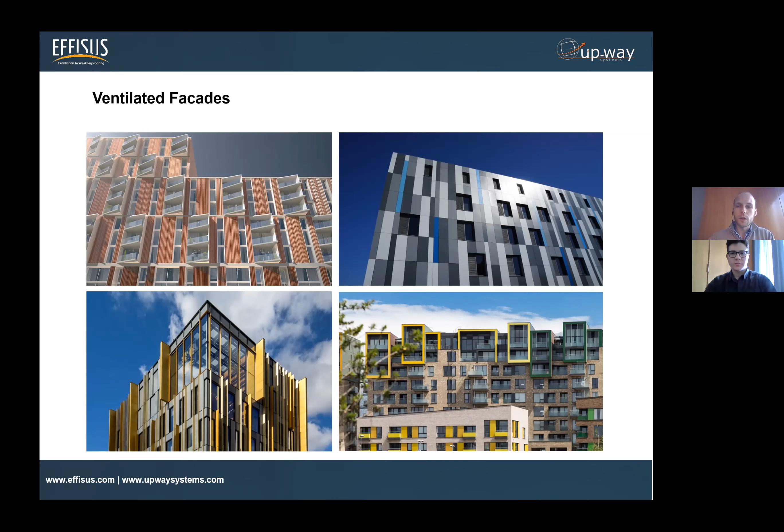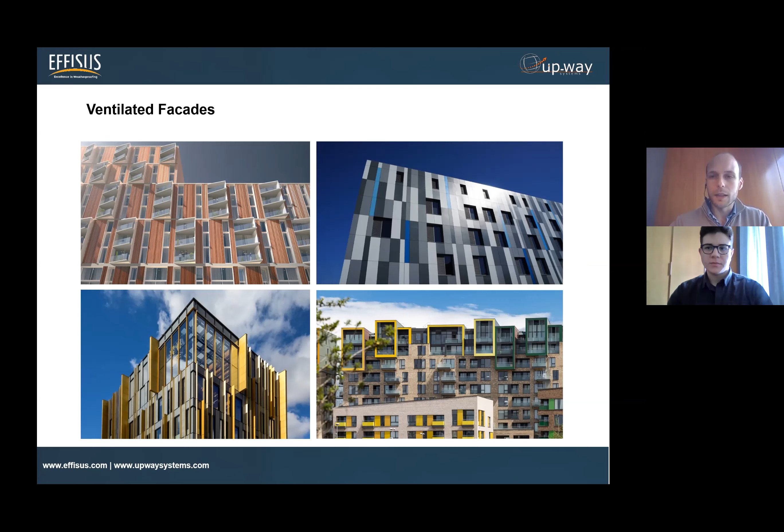Regarding ventilated facades, we all know what a ventilated facade is. We have an air chamber just behind the cladding that allows the facade to ventilate, so the moisture can evaporate. That's a whole process going on just behind the cladding to get the facade to ventilate. We can play with this kind of finishing, so we can have very different claddings and very different shapes. But we also know that the main performance in terms of management of water, air and vapor is not only on the cladding, but also behind the cladding, in the full facade composition. We'll be discussing that a bit more in this presentation.

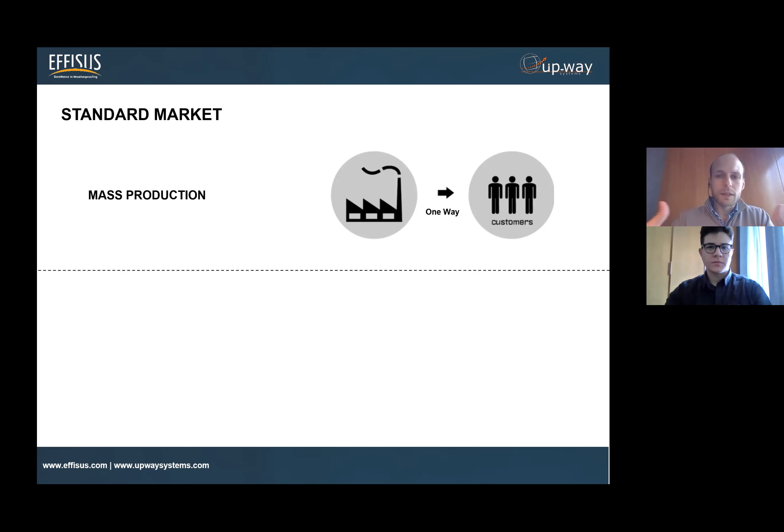So we have this standard market scheme that shows the industry right now is going in this one-way direction. This means that, in our point of view, the manufacturers are producing very standard products, and the customers just go to the manufacturer and ask for some specific or some products that they have available, but they don't even have a chance to discuss or adapt the product to their needs.

At Effisus, we really support, and would like this to be different, within this Effisus methodology, an interactive dialogue between the manufacturers and the customers, but not only, with all partners involved, in order to get the best solution we can for each project. This means understanding every project requirement and adapting, taking advantage of the technology we have available in each product segment, turning it into added value for your project, in terms of getting a very specific product or even a standard product that really fits the project requirement.

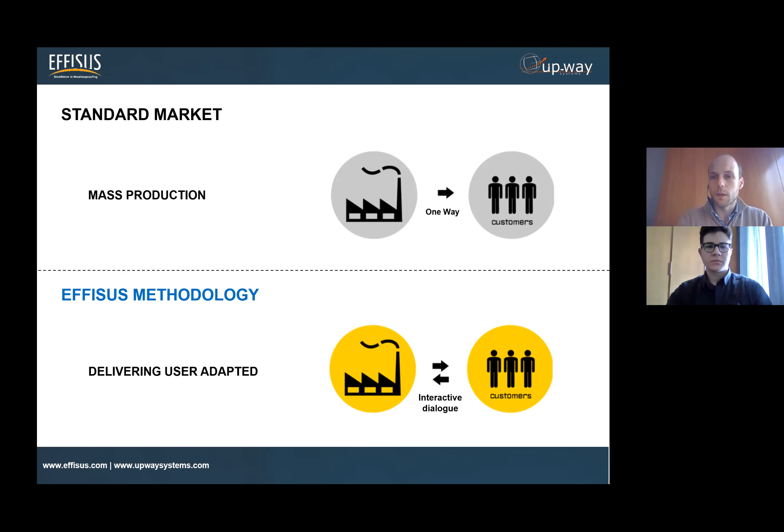So just giving an overview of our approach to the market, because we don't do this in a linear way just with the client. Of course we are focusing on the client, but we understand that in the very demanding markets we are involved in, we cannot do this in a linear way. We need to approach different layers of the facade industry, and those will be the consultants, the architects in the design stage, but also other players that help us reach the best solution in the end. For instance, laboratories and universities with whom we develop our products, test and certify them. We need to understand each market requirement in order to cooperate with these partners and reach a solution that fulfills the market requirements and each project's requirements. And of course insurance companies, the developers, because the whole industry plays as a single element sometimes.

Here, just really brief, as I'm aware you've already seen this: in the European climate it's cold on the outside and warm on the inside. We'll be focusing more on the European climate because it's the most used, for instance in the UK, where we have many projects ongoing.

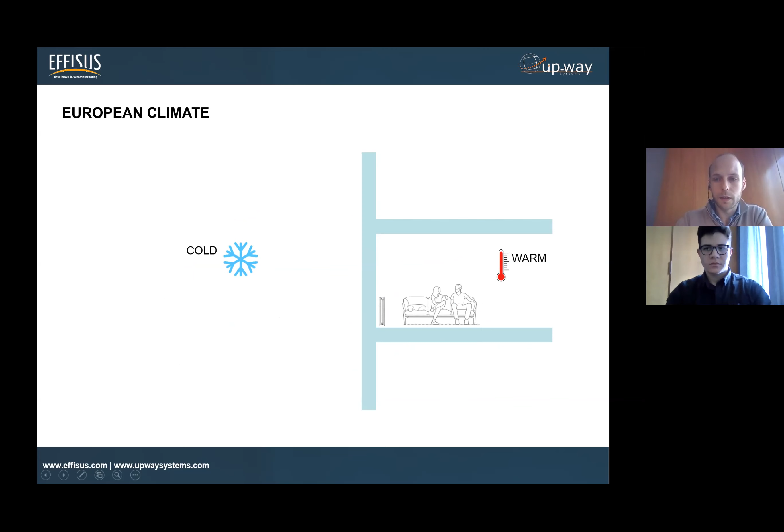Then of course we have rain on the outside in the winter season. If we look at the facade, the rainscreen cladding facade scheme, we'll see the cladding with its brackets holding the cladding. Then we see some particle board, for instance, or the sheathing board. Then the insulation layer, within the SFS system for instance. And then we'll have the plasterboard to finish on the inside. If we try to understand how vapor diffusion occurs within these facade layers, it's coming from the warmer side to the colder side. So if we try to block it, as we'll be talking about, waterproofing membrane.

If we try to block the rain from the outside, just protecting the sheathing layer, we'll see something like this, just covering this board and avoiding the water to go in. But if we do have a waterproof membrane that is also vapor tight, we'll be blocking also the vapor to go out, and of course generating condensation as the vapor will be present within the facade layers.

When crossing the dew point, so when it is turning into liquid, it will be just stuck in there and will damage the interior of the facade, in this case the insulation layers, that will not be performing well.

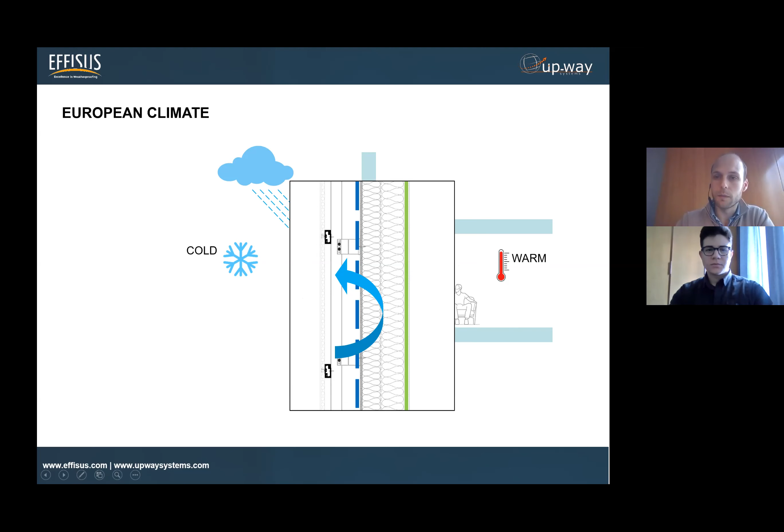So João, I don't know if you have any, not yet, any chat. No, yeah, you can just help me through with that. I would appreciate it.

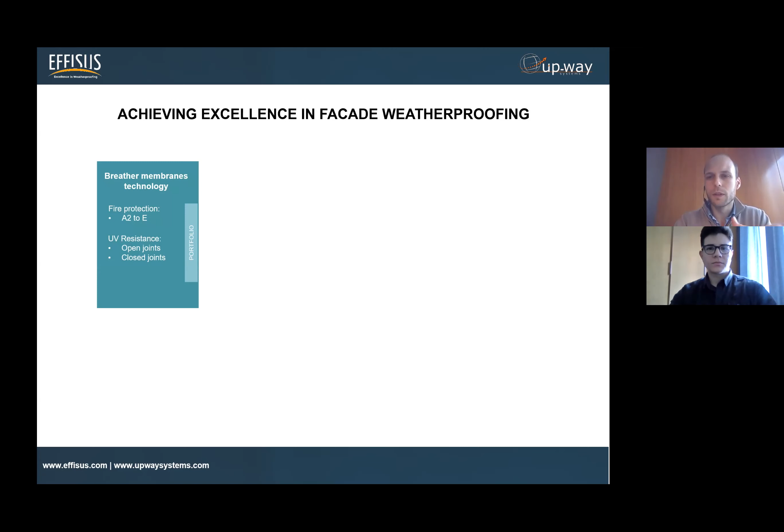When we talk about achieving excellence in facade weatherproofing, this is something that we discussed many times as we are within the weatherproofing thematic. So how do we see the facade in terms of weatherproofing, in terms of layers or divisions that we should approach and understand?

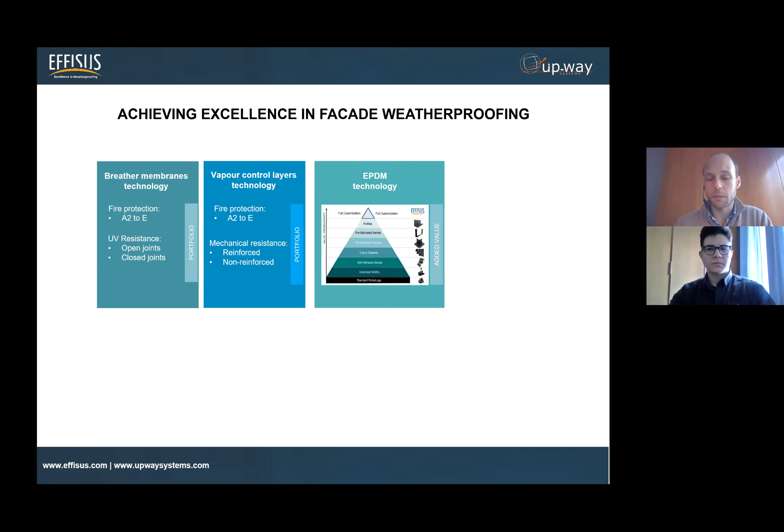So we have here breathable technology, okay, we have here VCL technology as well, EPDM technology, or interfaces technology, so something that connects both breathable and vapor with the interfaces, and we can be talking about windows, but also about roofing, existing buildings, so many others.

Then we have prefabrication technology, that is a very specific division that we have, that basically takes advantage of the technology already existing and turns it into very specific solutions. So really understanding very specific projects, very specific needs, and coming to the market with very specific solutions that fulfill those requirements.

And sometimes it's not able to do that with very standard membranes, very standard dimensions, and so we're able to go all the way across that requirement. And then we have our consulting department that is basically supporting these four elements.

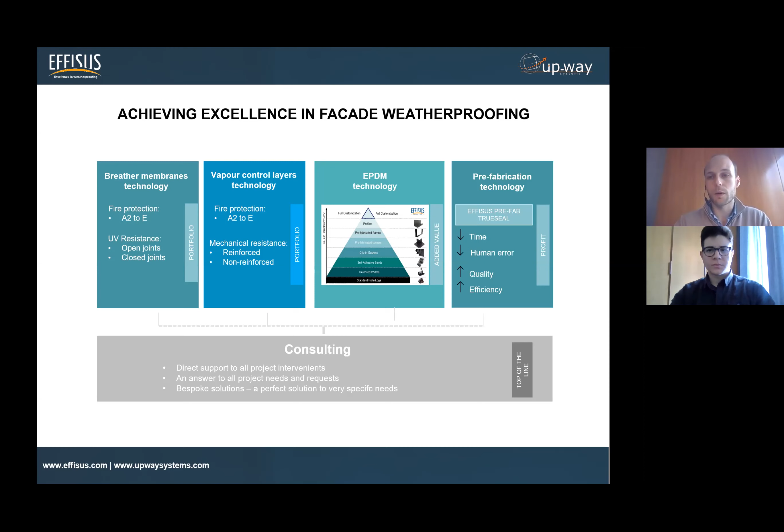And this scheme, in fact, is the one we are practicing, so it's the one we have in our company. But we really believe this is the only way of approaching a weatherproofing rainscreen facade and having a really high performance solution that again fulfills all the project requirements.

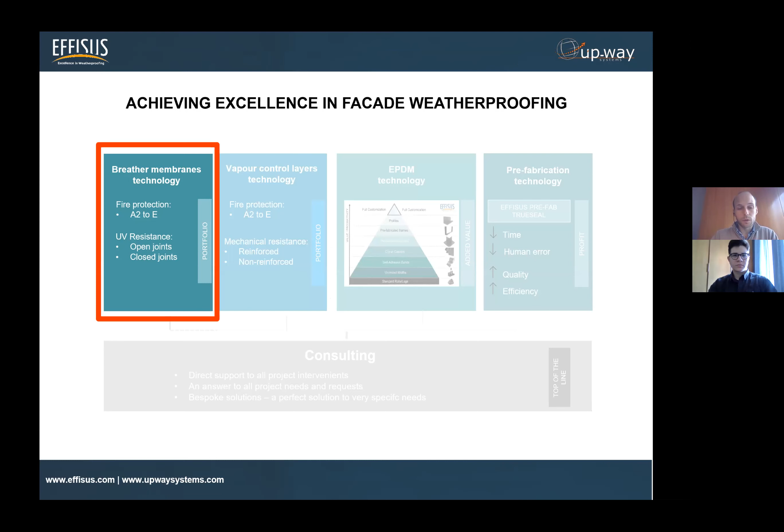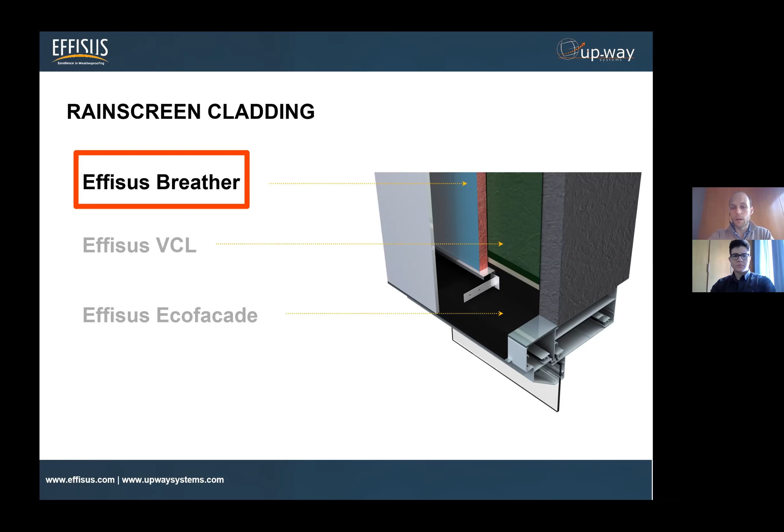So today we'll be more focusing on the breathable membrane, just looking at a 3D model where you see the breathable membrane on the outside of the insulation layer, the VCL on the inside, and this membrane just doing the connection, as I told, not only windows but others. And then we have breather membrane again that we'll be focusing on today.

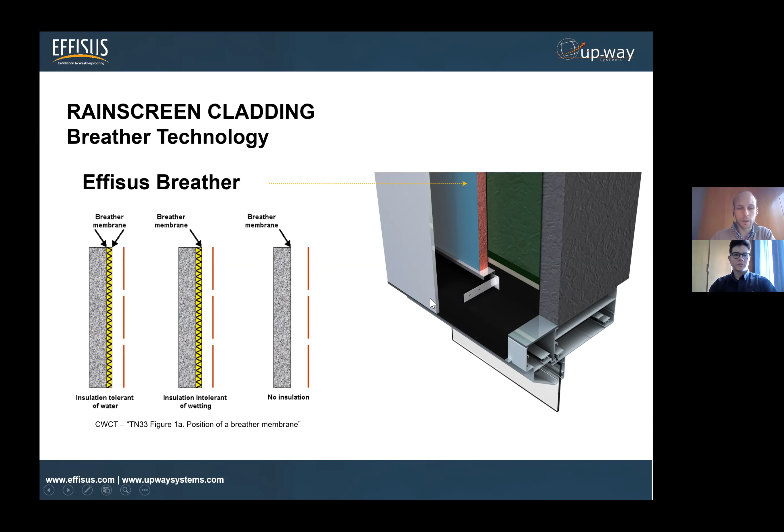So just speaking from this case from the CWCT manual, this illustration about the placement or position that we can have the breather membrane. Just to mention that this is not a linear approach, okay, we should look at every project as a single one. So this is just to mention that we can have different places to put a membrane as to improve the facade efficiency.

In this case, we have here some problems, so some corrosion of component, saturation.

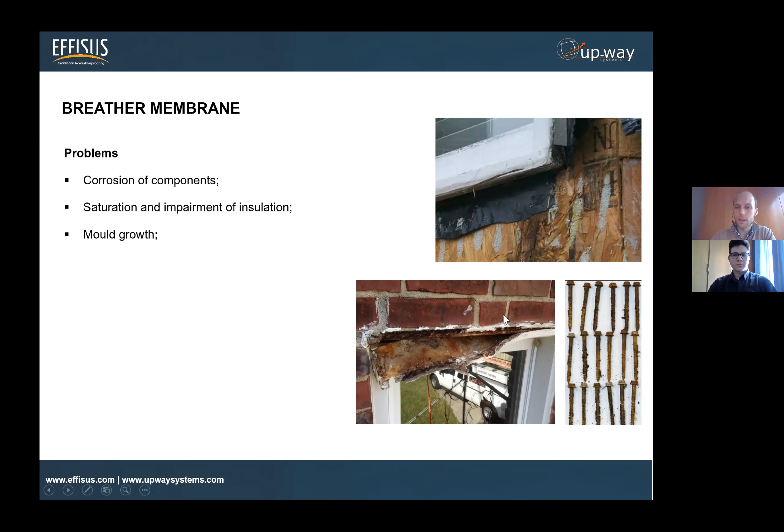This is also, of course, because of the water getting inside of the facade, or the water being imprisoned within the facade, so metal components being corroded. And then we have saturation, so insulation becoming wet and mold growth, as the water is not able to let the facade evaporate, or it's able to go in, maybe sometimes because of the lack of a VCL, for instance. So here are other problems as well.

João, would you like to highlight some of these pictures we're seeing now? Absolutely, Henrique. Here's a couple of situations we face, usually because of the lack of use of the breather membrane, or sometimes even poor workmanship during installation, not having a breather membrane. I'd like to highlight mold growth, because this is very common, especially in the UK market. We see this a lot. This comes from the fact that, as you're saying, mostly when you have wet insulation, this condensation will come in through the inside and start causing this type of problem.

At Effisus, we believe the insulation layer should always be dry, or as dry as possible. That's why in our projects we see competitors or similar products saying 'water repellent insulation layer' and stuff like that. What we recommend is to test it, actually see how this material works over time. I think it's completely different than having a breathable membrane.

Other types of problems we see are adhesion problems and compatibility between substrates, depending on how it's installed. Sometimes we have an open gap. For instance, we have data showing that if you have a 1 millimeter gap during installation of a breathable membrane, you're actually adding up to 800 grams of water per 24 hours, or per day. This is stunning when it comes to all the problems we see on site, and that's why today we're focusing on how important it is to have a breathable membrane in this case.

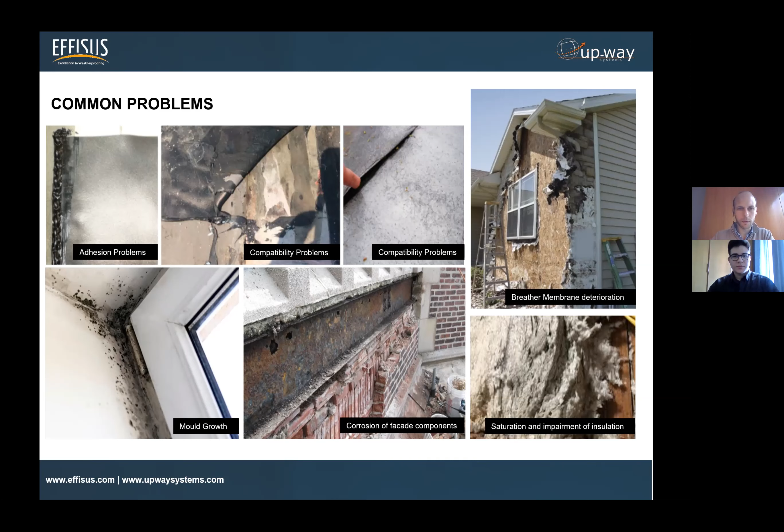One of them is the protection against driving rain, because, as I mentioned before, we are in fact using a breathable membrane as a waterproofing layer. So it's to protect the facade from driving rain, meaning we cannot have liquid water coming from the rain and reaching the interior of the building.

Then we should also be able to understand its protection to wind and moisture. With wind, we have different breathable membranes—some of them are more airtight than others, for instance, and some of them play with the pressure of the air. But all this information should be available on the technical data sheet.

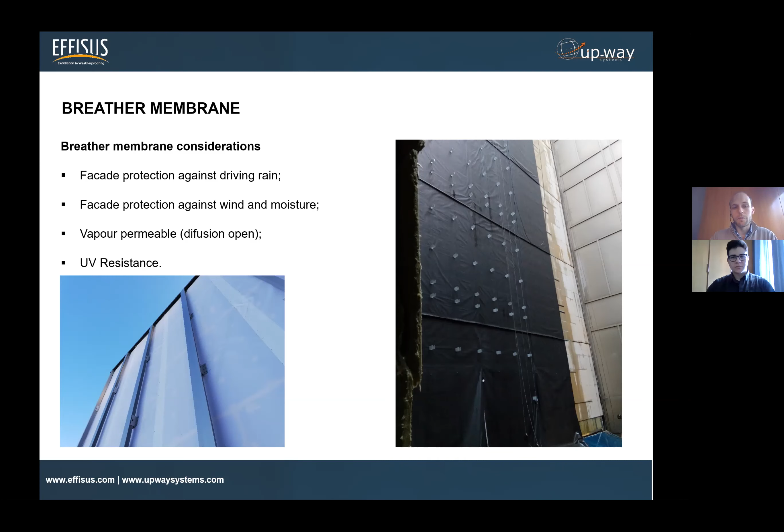And then we also have UV resistance, mainly because of the installation process—during construction it will be fully exposed until the cladding comes, and this is something we should be aware of and comprehend. We need to understand how long it will be exposed to UV, and whether it will have open joints—for instance, if the cladding has joints of 40 or 30 millimeters, we should pick a membrane that's able to withstand this kind of UV exposure, because many of them are not prepared for it. So these are some of the considerations.

João, would you mind guiding us through this table, please? Yes, so here is pretty much our portfolio when it comes to breathable membranes. Again, it comes down to the project experts to understand what you're going to need for your project. I'd like to mention, as you said, UV on the last slide.

This is actually quite important when deciding which breathable membrane to choose when you have an open cladding joint. We have a couple of possibilities. For instance, the Breather FR-B allows us to have open cladding joints up to 50 millimeters.

It's important to mention that even during the construction phase, most of the time these breathable membranes are going to have total exposure for 3 or 6 months, so of course we need UV resistance for that.

Another very important fact is the tear and tensile strength. As you can see here, it can go from a regular breather membrane to a very extreme resistance to tear and tensile when it comes to Breather FR.

The same thing is a very important topic in the UK and Middle East markets, which we're constantly facing with this type of project: fire reaction resistance. We're able to provide from Class E to Class A2 S1 D0, which is the best you can currently find in the market.

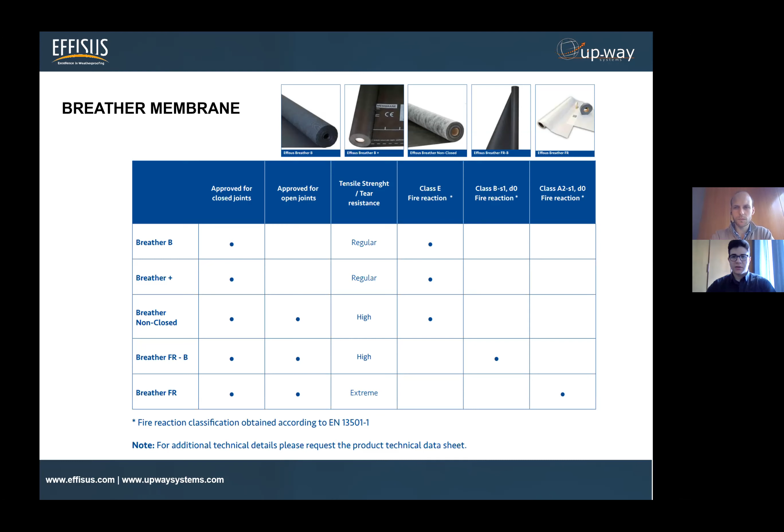Very good. We also have the last one you were just talking about, fire, and it leads into this slide mentioning the A2 fire-rated breathable membrane system we have. Just a few more details you'd like to share about this specific membrane and system?

Yeah, we've mentioned this product a lot, including in our fire-rated sessions, when it comes to the Effisus portfolio FR system. What's very important to mention about this product is, as I said, when it comes to fire reaction, it's the best you can get on the market.

We're able to achieve this because of the whole material properties and technology we've had since 2011. This is important to mention, because even just a couple of years ago this became a very topical issue, but we already had this ready to sell since 2011.

This whole membrane is tested and achieves the A2 S1 D0 fire reaction classification, including the accessories. So this is quite something different. When I mention accessories, I mean the fastenings, double-sided adhesive tapes, and fast adhesive tapes for sealing perforations.

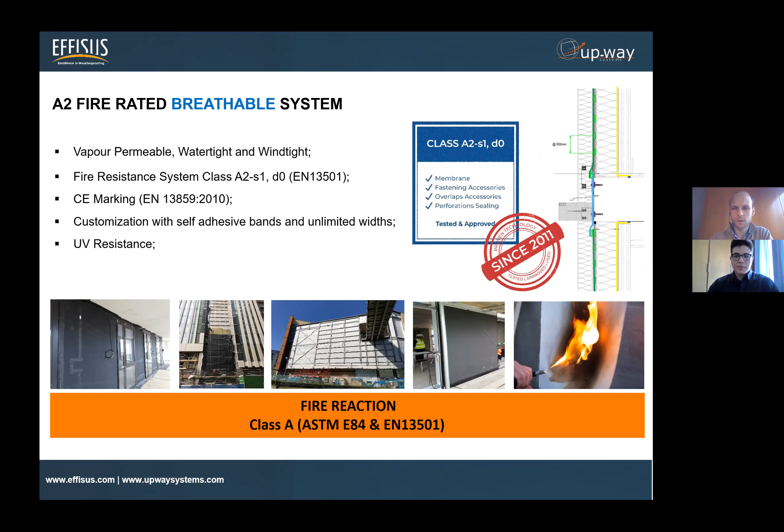The standards say this should be tested standalone, but we decided to go further and include all the accessories. Would the fire reaction classification remain the same? That's what we did, and that's why we call it the FR system—because it includes the whole accessories for the application. It's a very important thing to consider.

Here we can also see, regarding this solution and system, since 2011, with all accessories included, a relevant difference between standard Class B membranes and our A2 fire-rated membranes. Here we see fire performance, as we were discussing.

You also mentioned in the table different levels of performance in terms of tensile strength. Here we can see there's really a big difference between our A2 FR membrane and a current standard Class B membrane, but also in tear resistance. So in terms of mechanical resistance, this is really a solution that improves facade performance.

Absolutely, Henrique. What I always mention here is that you're not only buying fire performance, you're also gaining a lot in mechanical resistance, tensile and tear resistance, compared to just a normal Class B breather membrane. Again, this is because of the whole technology and material properties—it's based on fiberglass, so it's very mechanically resistant. Yeah, indeed. Okay, thank you very much.

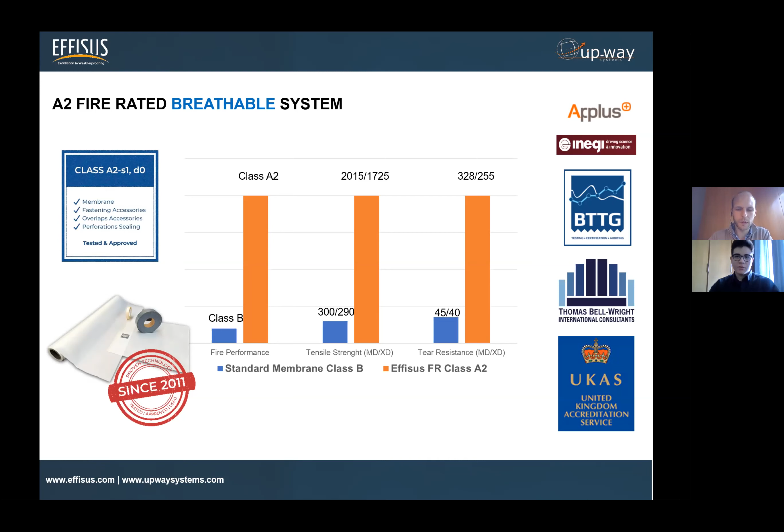So just briefly going through the method statement of the membrane, also to allow you to understand that this membrane has these interesting features, so interesting resistance, etc. But it's no more in terms of installation than a...

The fixing to the substrate is currently done with the self-adhesive membrane, so both sides self-adhesive, like this tape here. We just remove one liner and apply it to the CP board, for instance, then remove the upper liner, and you can unroll the breathable membrane on top, and it will be automatically fixed on that.

This is a temporary fixing, as the cladding will then bring its own brackets and will hold the membrane definitely into place. But even until those brackets come, we have really interesting experiences on some ongoing projects, and some already finished, where they have experienced really high winds, heavy winds, and even without the bracket, only with this fixing tape, it stayed in place. So, perfect, good, very good performance. But again, this is intended as a temporary fixing.

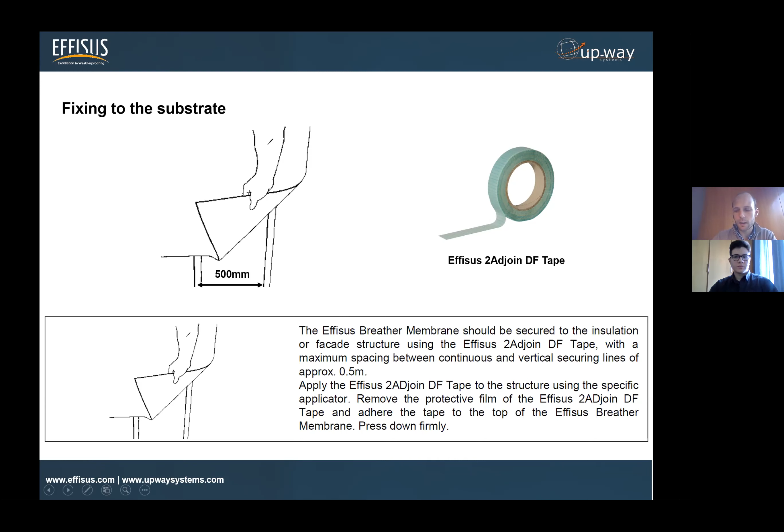And then the same tape in the case of the breather FR membrane, which is also an interesting feature, because it allows you to play with one single tape to do two things with the fire-rated membrane, that is fixing to the substrate and making the overlap. So in this case, we'll be applying 2 lines of this tape on every overlap that we have between rows of this membrane.

But as we play with the full portfolio of breathable membranes, we also have cases where we should use different tapes. Even though we'll be always supporting the site, supporting the design, in order to understand these accessories that should be used or not, and how they should be used, because that's something we really find important to share. We do not believe it will be easier for someone outside this spec of products to understand how this should occur, or what's the best accessory to use in this kind of substrate, etc.

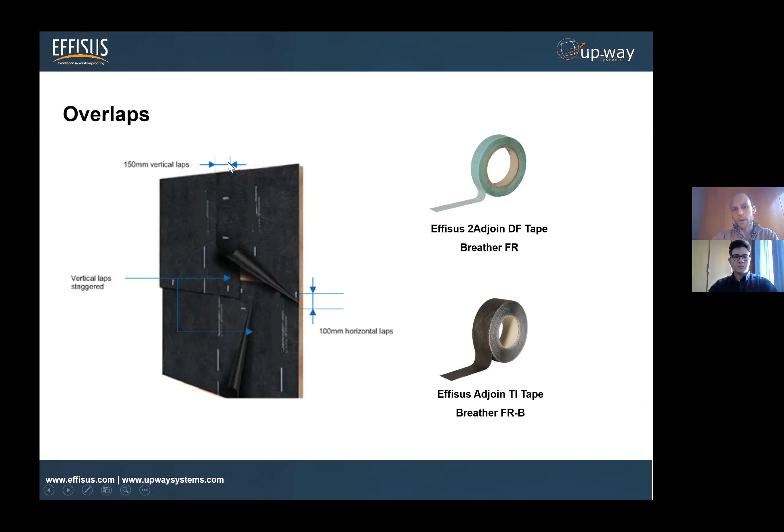So here we can see also some mention to the overlap width. So we can see 150, 100 millimeters. I can tell you that this is a very usual overlapping width, and also applicable to the fire-rated and to the other breathable membranes that we have.

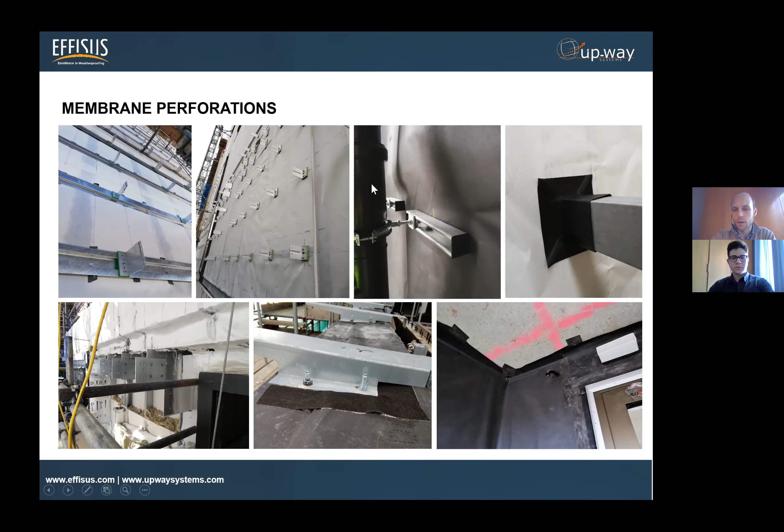So we have solutions for each of these situations. And for instance, when we're talking about a membrane being perforated by a screw or nail, we have a very specific tape. João, would you mind just sharing some information about these solutions, very interesting solutions that we have for this kind of perforation? Yes, indeed. So here, what we do is obviously look into details of each of those perforations, how actually we need to seal.

So here it assures the complete watertightness of this sealing of these brackets. So in all the projects, what we do, when we have this type of bracket sealing scheme on the facade, is just to apply a patch of this membrane that comes in rolls, as you see. We cut it to the dimension, say a 5x5 or 5x10 patch, apply it on the bracket itself, and then fasten it. Once you fasten it, it will be completely sealed.

We have additional testing on this tape itself, we have a lot of experience. Again, this is all tested, for instance, in the Effisus FR system. So it's very important to have someone look into the detail of how exactly you're going to seal this perforation. The important thing here is just to pick up all of these details in an early stage.

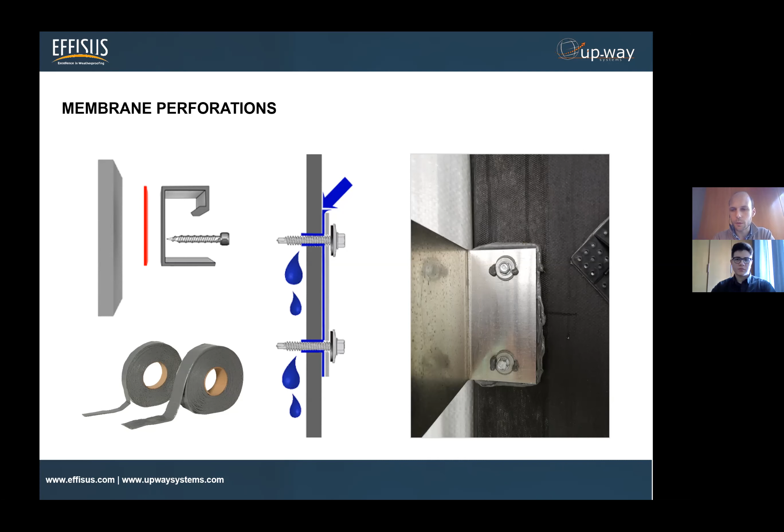So when, for instance, we're quoting a project, even if it is still in the design stage or already coming to the site, we also take into consideration this kind of perforations, this kind of consumption. So we try to give an estimate of how many brackets we may find on the job, and we also try to provide this information even without being requested.

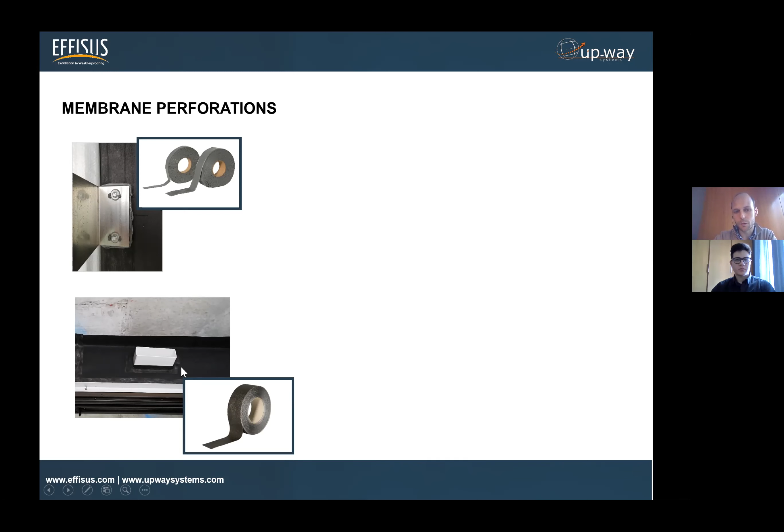Just to understand, we have many times these tubes just crossing the facade, normally because of ventilation requirements. We can deal with a very simple tape to avoid this kind of leaking just on this perforation.

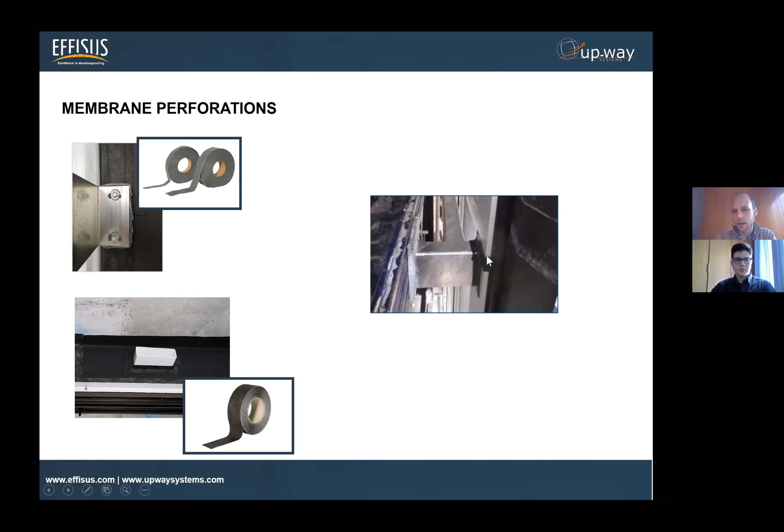Then also different kinds of elements and materials that we need to shape, or find a solution that is able to shape all around it. Here we can have different tapes, some of them really interesting. There are, for instance, EPDM based, but able to be shaped so that we can turn it into the very specific format of the element that is crossing the facade.

We can also play with already prefabricated EPDM pieces, for instance, that still have the same capabilities of the normal, standard EPDM, but avoid the need to cut and slice on site and cover all of it with glue. So making a great finish and better efficiency.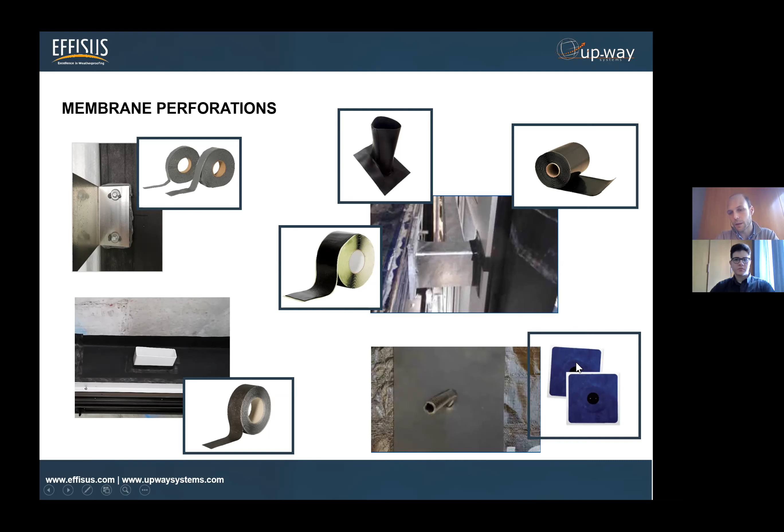And then, for instance, pipes — we have these tight rings that are just applied on the tube, on the pipe, on the cable, in order to seal completely all around the cable, and to make a perfect connection with the breathable membrane. Self-adhesive, really easy.

Then just to overview a little bit about the importance that we find on detailing breathable membrane. As discussed, for us, every project has its specific requirements, and so we really understand that for each project we should have a very specific solution.

Not the same breathable membrane for every project. We need to understand each project's requirements, and some of the requirements we've already highlighted before, such as UV resistance, water, vapor permeability, fire, etc.

This, of course, will allow us to reduce the probability of leakage points, as all of it will be predicted, and we'll also be focusing on the perforations, as we just saw on the last slide.

Compatibility will also be ensured, as we'll be playing with our own accessories, and when reaching other membranes, we'll ask for samples or technical data sheets in order to understand if it is already tested and if it is in our history of testing.

This will allow us to deliver proper training prior to the installation, because when we're closer to the design stage, we'll have full information of the project, and we'll have better conditions for delivering to the site.

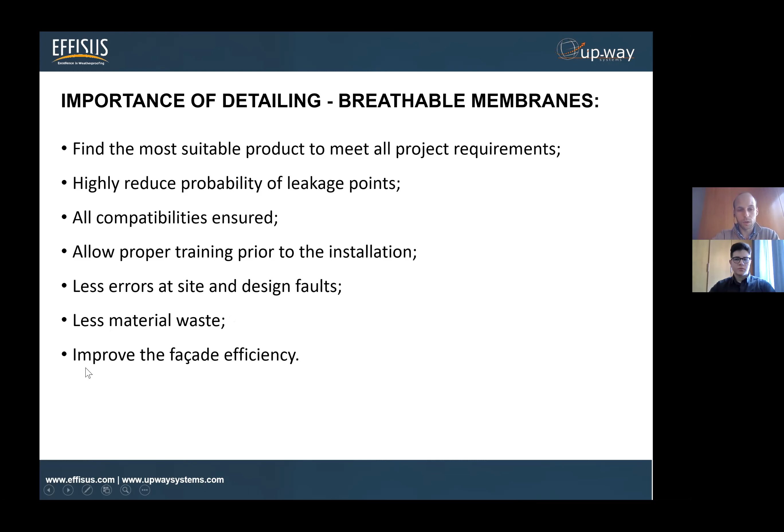Following this point, there's also less material waste. Of course, we'll understand how many tapes we'll need for the project, what's the best accessory to use, and explain to the site again how to use it — improving facade efficiency as a whole.

And so that's what I wanted to bring to you today with this Connected Value session.